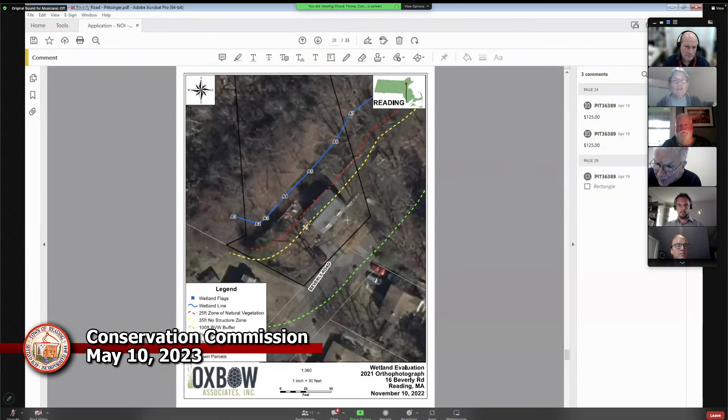On Monday, which was May 7th I believe, 5 of us arrived at 16 Beverly at about 8:30 in the morning to conduct a site visit. At the commencement of the visit, we rang the front doorbell and knocked at the door, but nobody answered. We waited a few moments, then conducted the site visit.

We observed that the property slopes gently downward from the road, approximately 70 feet, at which point we encountered a chain link fence above a retaining wall. The retaining wall was about 10 to 12 feet tall. We measured the back of the house as being about 12 feet from the retaining wall.

The back of the driveway was about 39 feet from the retaining wall. At the base of the retaining wall were the wetlands. They almost abut it, but not quite - we measured that out to about 8 or 9 feet. But what that means is that, as the applicant indicated, the project is fully within the buffer zone, though I believe it's outside of the wetland setback.

To the left of the house as we faced it, we saw a grassy yard where, as the applicant mentioned, there were some 2 large diameter trees that I saw - he mentioned 3, I only saw 2, but he mentioned they've been removed. There is still an oak tree in the front of the yard.

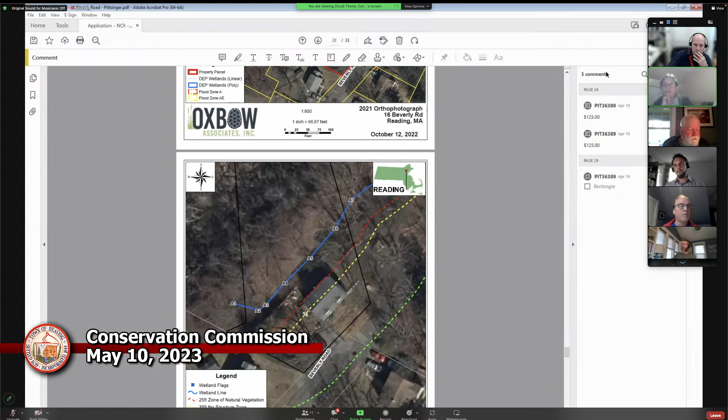Okay, and Bill, you have your hand up. Consistent with what Brian just said, I actually have a lot of questions, but I understand that's not for now, just observations. So the one other observation I would add is where the PVC pipe comes out, it looked like it was connected to the downspout.

There's this significant depression at the base of the retaining wall. The only thing keeping serious soil scour from happening is the fact there happen to be leaves there. There's no structure at all to prevent soil scour. So I'll leave it with that observation for now.

And when it's my turn, I have questions, as Brian does. Thanks.

Anybody else on the commission with observations? Okay, I do have one, and that is that at the front corner of the property where the arrow says 24.3 feet plus or minus, it looked like there's a white fence that goes out to approximately the property line from the side of the house.

I looked back at the aerial photos, and it would appear that fence was put in sometime between 2015 and 2019. And being that this whole property is within the 100-foot buffer zone, it would have been appropriate to have the conservation administrator approve that fence back in 2015 to 2019 when it was put in.

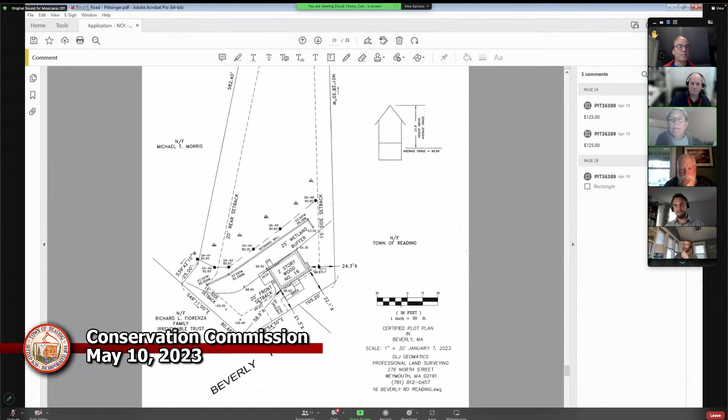Bill. Thank you for the plans, for the information, and also for the information you provided during the site visit. So I'm just going to go through the document with some questions, and if you happen to have an answer as we go along, that'd be great. If you don't, that's fine too.

But let's start with this: based on the documents you received when you purchased the house in 2019, what's your understanding of when the retaining wall was built? I'll explain the reason for that question after you tell us. So from my understanding, the retaining wall was built to facilitate the construction of the house, which was, I believe, in 1990 to 1991. That's what's on the deed.

So when you look at the adjacent land, it falls off pretty quickly, and I assume in order to get the foundation in, they would have needed to do this work. So I believe it's from the same era.

That gets to my next question. From page 1: extending along the bottom and adjacent to the bottom of the wall is a shallow ridge of side cast material excavated when installing the retaining wall. Knowing that this occurred in 1990 to 1991, it's not clear how the specialist would know that. We're talking about quite a few decades here.

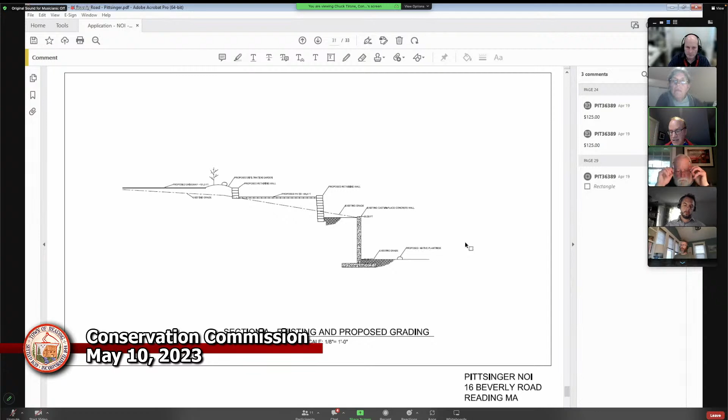Okay, thank you for that. Then on page 2 at the bottom, similarly, it says in the last paragraph, while investigating the wetland resource area, Oxbow documented soil profiles. Portions of the delineation coincide with the extent of the sidecast material excavated during the wall installation. Again, now hearing that's 1990 to 1991, I don't know how your expert confidently made such a conclusion, but that's okay, just putting it out there.

But let's go to page 3 and the proposed project. You've explained about the trees, and you've explained the garage, site work and deck will be in the 35-foot no structure zone, the 25-foot zone of natural vegetation. That's all true, but that raises a very important question to me, one of the key questions of our hearing tonight: why is this being presented as a notice of intent and not as a request for a variance?

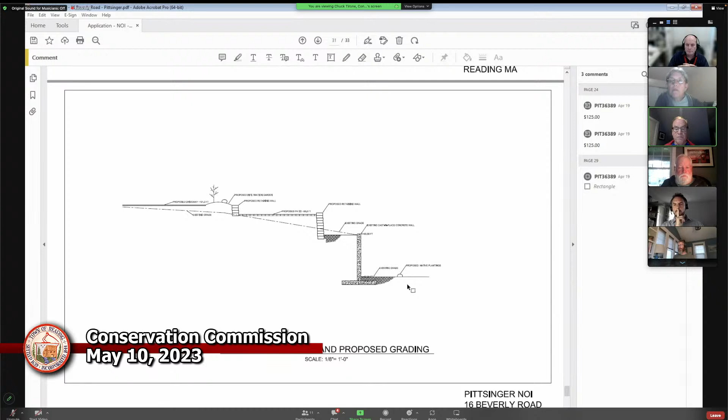Let me explain the reason for my question. It seems to me, based on the fact we're in the 25-foot and 35-foot zone, that what's really needed is a request for a variance, because strict compliance with the regulations simply isn't possible.

And the reason it's important to ask about the variance is there are certain requirements for an applicant, and we assure you we've had many applicants come forward attempting to meet such requirements, where you have to explain alternatives that were considered. Were they reasonable? This is from section 2E of the local regs. What mitigating measures are proposed? And then there has to be an overriding public interest.

Now in the case of a single family home like yours, that can be mitigation which improves the resource area. But there's no description of that here. So at least from my perspective, that's a very big issue.

Then we go to, on page 3, you mentioned engineered infiltration is not recommended, and you have explained that. Your concern about the safety, the integrity of that retaining wall, that makes sense.

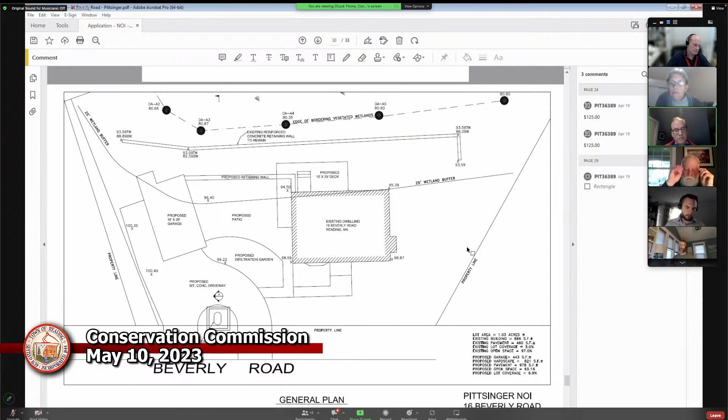But nevertheless, in your diagram, you happen to show at the top level a proposed infiltration garden, which sounds inconsistent with this concern about having any engineered infiltration, because of course an infiltration garden is a kind of engineering of the landscape.

But also, in the same vein, at the base of the existing retaining wall, past the existing grade, it says proposed native plantings. Now that actually looks like the sort of thing one would expect in a plan that's requesting a variance and suggesting mitigation. So I wanted to ask you: that proposed native planting, that proposed infiltration garden, was that in the spirit of offering some kind of mitigation, or is it something else? I'll just pause and let you comment on that.

Sure, yeah. So let me just provide a little bit of background. I employed a few people. So Oxbow, I forget exactly what they are, but they did the wetland delineation, and they provided their assessment of what vegetation was there and things of that nature.

And when you're talking about the side castings and that kind of stuff, that was their wording that they provided to me. And I think they got there by doing some soil plugs and borings, and just looked at what was coming back out of that.

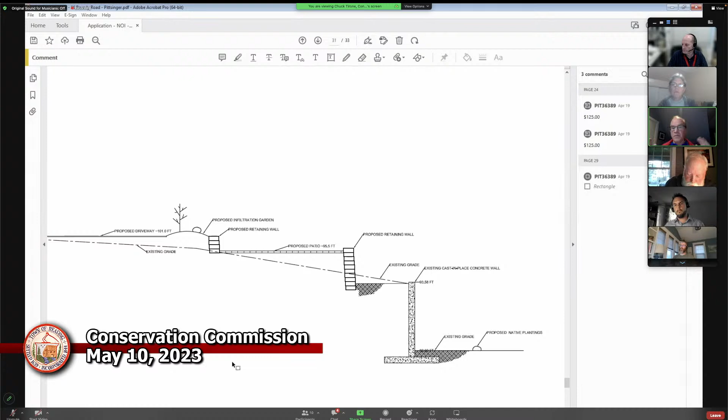This is based on our experience as commissioners seeing a lot of different properties, so just wanted to give you that feedback. The other thing is, it says in the italicized paragraph that the area at the base of the wall is unmaintained. It's unclear to us, given our charge to protect the wetland, why that would be a virtuous thing, that no maintenance is done. I understand what you're saying about the retaining wall, but again, we're focusing on that adjacent wetland. We see water going in various ways - there's the weep holes, there's the black PVC pipe, and there's also the very modest lip right at the edge of a sloping property.

And others will probably speak to this, but what we saw in the soil at the base of that retaining wall, only part of it, we commented on this on-site, looked as if it were naturally vegetated. The rest did not. And if this is all going to work as the regulations intend, at least from where I sit, and others will speak, we would want to see something more there.

On page 5, the proposed work reads that it will all occur in developed portions of the property currently maintained as turf, so no work will impact areas that are not currently developed. Our regulations do not treat maintained turf grass as equivalent to building a structure, a patio, and so forth. In fact, one way to know that's the case—this isn't a minor project, but just to illustrate how it's seen.

For a minor project, for example, conversion of existing lawns to use as accessory to houses, it would have to be located more than 50 feet away, and it would involve modest things like open slotted decks, et cetera. I'm only pointing this out to show that, as I read this, the reasoning seems to be that it's all developed, including the turf lawns, so nothing's really changing here of significance. And I don't think that's consistent with how the regs are written.

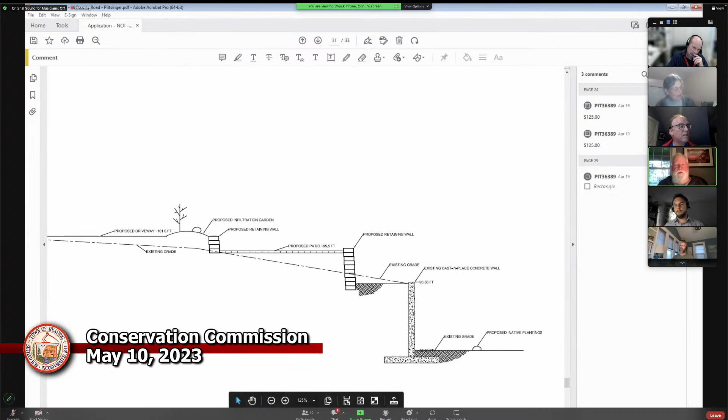So actually, to follow up on something that Bill touched on, Bill talked about alternatives. What alternatives have you considered, Jeff, in particular for the size of the garage, the extent of the driveway, things of that nature?

Sure. I mean, the limitations here are kind of twofold. It's a garage, so it has to be a certain size to function as a garage. At least this size is about as small as it has to get in order to fit a vehicle in there. I'm also restricted by zoning as to how close I can get to the roadway—it's a 20-foot offset, and I have almost exactly a 20-foot offset to the front of that structure. The same goes for the property to the side, which requires about a 15-foot offset, and I have about a 16-foot offset.

So as far as moving it further away from the wetland, there's not a lot of options, as that goes for any part of my property. This is on the left-hand side here. On the right-hand side, obviously the property line necks in pretty quickly, and there's no opportunities there.

So Jeff, if I could cut in for a follow-up—how deep is that garage? On here, it's drawn essentially the same depth as your house, so can you give us actual dimensions? You're asking the depth of the basement?

No, the garage, the proposed garage on the left-hand side. So, 18 by 20, 16 by 20? 16 by 26. So 26 feet deep is what you need to get a car in there? About 24 feet deep would be a minimum to get a car in there. Okay.

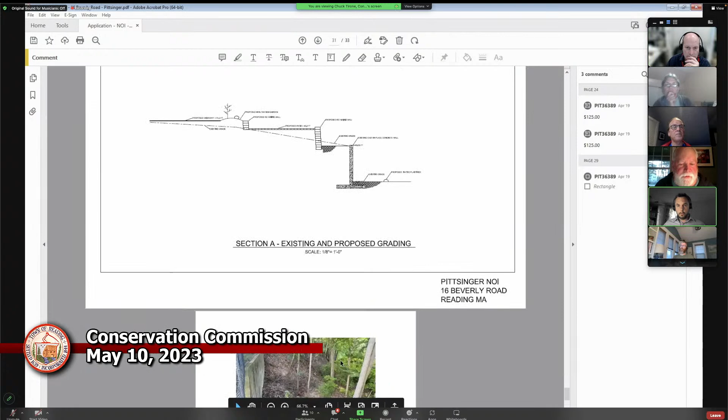Okay, so on your plan, you have a list of various square footages and what have you. Chuck, can you scroll over and down to where those square footages are? A little more, yeah, and then back up—over to the right-hand side. Yep, can you make those larger?

Sure thing. So Jeff, just so the commission understands, this garage also functions as an accessory apartment, so some of the sizing is because of the combination between the two. Yeah, it's also my desire to permit this as an accessory apartment as well.

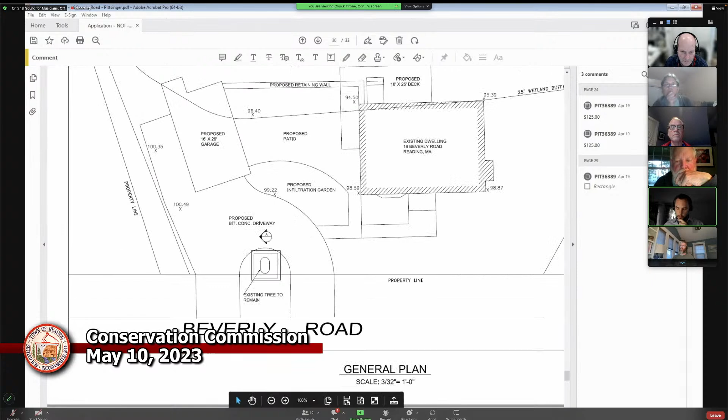Maybe a little bit bigger for these tired eyes. Okay, so yeah, I did break it out here a little bit in more specificity.

So proposed garage is 443 square feet. Proposed hardscape is 821. Proposed pavement is 978. And then I've done the percentages on open space.

Okay, so let me ask you, what is included in your proposed pavement number? It is the area of the driveway, so the entrance from the roadway, the horseshoe structure, and the area up to and beside the garage.

Okay, so when we were there, you were saying that your plan was to remove part of the right-hand side of the driveway in order to add things beyond the tree for your U. So I got the impression that you're expecting the driveway to be essentially the same size, yet here it's basically 2-to-1. Yeah, it is larger.

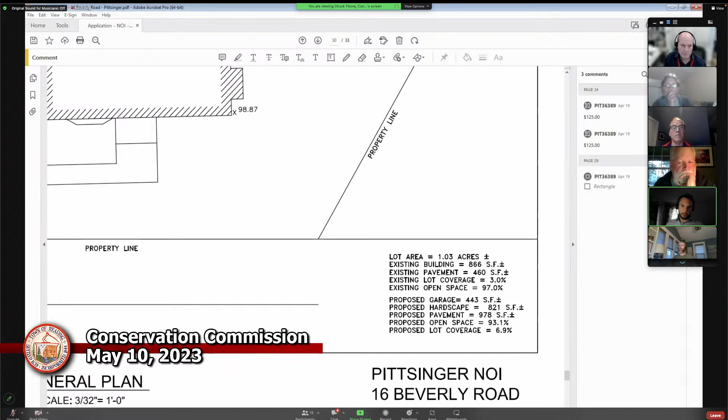I mean, if I keep the driveway where it is right now and then extend it to where the proposed garage is going to be, that's obviously an extension. So there's almost a doubling if I just did that. But that doesn't really work particularly well because the garage is quite a bit further toward the left property line.

So talking to the engineering department, I can split my driveway. It creates a clearer shot into the front of it because I can't remove that tree that's on the property line. Beyond that, because I'm hoping to also have a permanent accessory apartment, I need at least three parking spaces, which this would essentially allow. Even if you put one in the garage, there wouldn't be a way for that car to get out, being the problem with the other two.

That's the intent. Okay, so let's talk about the newer retaining wall for a bit. First point I want to make is, at least from the aerial view, that wall also appears to go well off the property into the property next door. Do you have any thoughts on that?

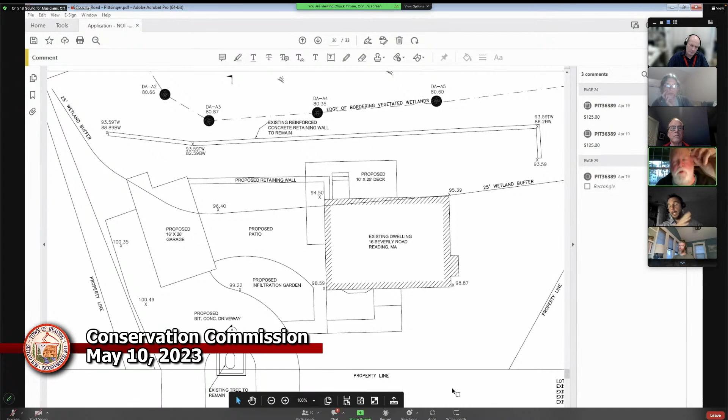Which one is this, the newer retaining wall in conjunction with the trampoline? No, I've measured it subsequently to getting this, and it's on my property. I didn't have a surveyed plan when I built it, and when I purchased the house, I was under the impression that we owned more than we did. But subsequently, I've measured it out, and it's appropriate.

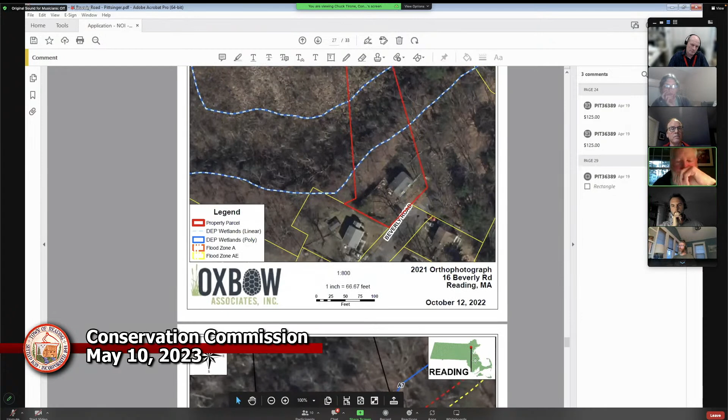Okay, I can double check that on my own, but when I used the GIS and zoomed in, it seemed to be beyond it. So what do you think we do with the fact that we have this recently installed retaining wall that wasn't approved?

You guys are guiding me here. I'm not an expert in this field. I'm looking at things as pragmatically as I can and saying, when I look at this, do I see a significant impact or an impact at all. I understand there's the wetland, there's all these buffers, and I've read through the regs, I understand what's there. I'm just trying to look at it pragmatically and saying, does the change at all impact or significantly impact the surrounding area? And I struggle to believe that it does.

As I said, we have the existing retaining wall that's there that creates this delineation. Going to your point as to whether there's enough freeboard on that to hold back water, I've never seen water flow over it like in a cascade fashion. It would be, if that were to be the case and it happened regularly, it would be stained. You'd see sediment at the bottom and that kind of stuff. It's simply not there.

So that's my perception, is just I look at these things as saying, does it have a detrimental impact to what is already there and corresponding to what's already there? I don't believe it is, and I understand that's not part of the regulations per se.

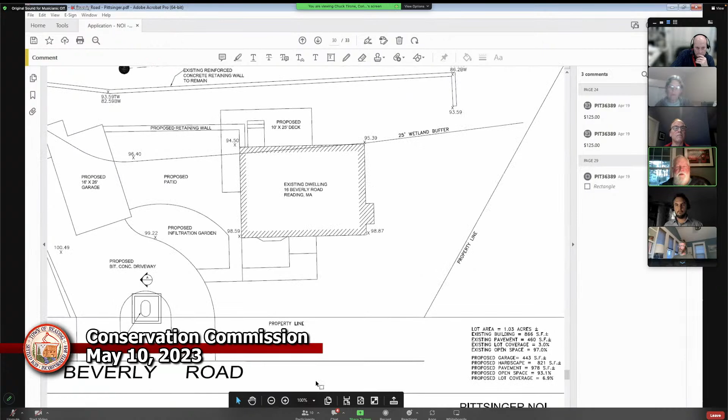So to allow me to finish, in summary, what I'm seeing is a project where you want to basically double your pavement. You want to add a patio, not sure the size of it, a larger deck, and a garage, which is also hoping to be zoned as a living space. And this is all essentially within, or mostly within, the 35-foot zone, and yet you're offering almost nothing for mitigation for that. Is that a fair summation?

I would tend to agree with you. Yeah, it's the first time I'm trying to walk through this and understand what you think mitigation looks like. To some degree, I look at the existing areas below the retaining wall, and yeah, there's certainly yard waste down there, that's for certain. But beyond that, would it be like adding native plantings or otherwise? I guess I can certainly look back into that if that's what needs to be happening.

I'll be honest, I went down the road of an RDA last year. I was given the direction by this crew to pursue an NOI, and so I've done that, and now that's where I'm at now.

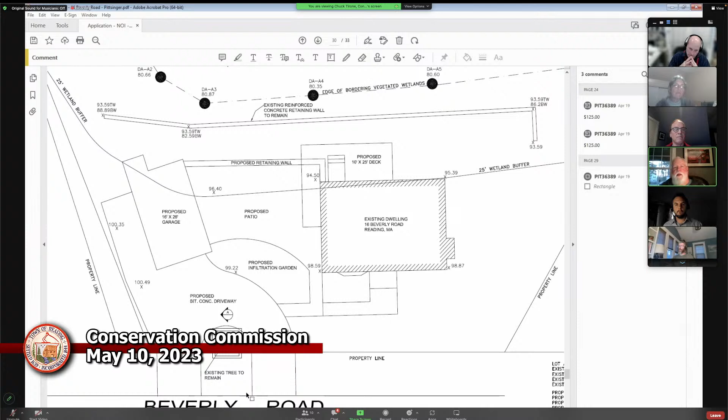So I want to finish up so others can have a turn, but I just need to say that I'm uncomfortable with all of that work you're proposing. I would like to hear if you had different thoughts on alternatives—smaller patio, not a large deck, whatever—but somehow to reduce your impact. And so I'll let it go there, allow others to speak, but just so you know where I'm coming from.

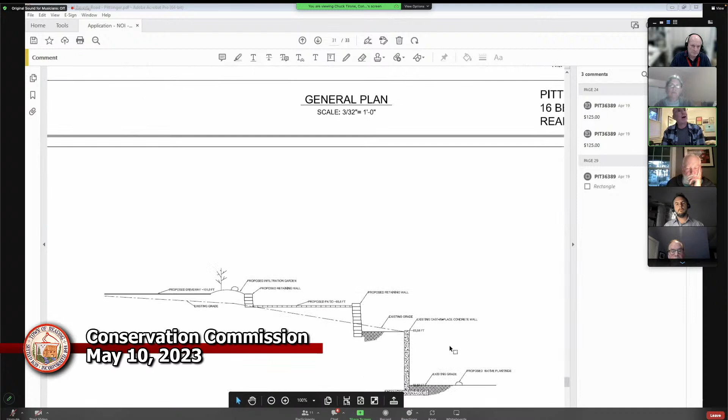I'm guessing that pushes you further into the 25-foot zone. So when you're thinking about how to potentially move things around, make it as much as possible, especially the garage, to be outside of the 25-foot wetland buffer zone. I'm gonna stop there for that kind of stuff.

But the one thing I'm just thinking about is this wall. You say you're engineers, so maybe you could help me with this, but concrete has a lifespan. I don't think we're nearing it for this, but it was built in 1990. Usually 50 years is something like that for a concrete wall. It looks healthy-ish - I'm not an engineer, so maybe you know better - but you definitely see staining on it. I don't see any cracking, but what is the future of this wall? What do you think the lifespan is of that retaining wall?

Well, just addressing the wall itself - there's a crack at the far right-hand corner, right at that 90-degree turn. That's a very common place for increased load, so it's not uncommon to get a crack in the concrete, and the reinforcing then takes care of it after that. There's some cold joints evident in the wall - you can tell from where they poured initially and then didn't consolidate it well enough on subsequent pours. So those are things that you look at.

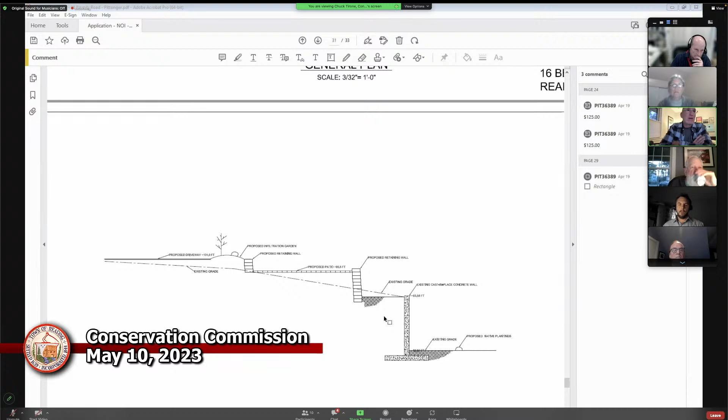So, anecdotally, my neighbor has been at his property for 40 years. He saw this whole construction and told me about it - there was some significant earth-moving equipment sitting in the wetlands. That's what happened. So that's where I understand your point, honestly. The damage was done 30-plus years ago, so what's going to happen up top now is questionable in my mind.

I need to think about it more and maybe ask our circuit rider. I need to process it more personally. But I would appreciate it if you came back and showed us some potential alternatives for how you could move things around. I'll leave it at that for now.

Tony has his hand up.

Hi, thank you for coming tonight and for answering all the questions presented to you. This is a fairly in-depth discussion, and you seem very well prepared. I wanted to say that I think there's an opportunity here with this project to improve the current hydrological connection between the property and the abutting wetland.

We've spoken a little bit about that 6-inch approximate PVC pipe near the top of the retaining wall. We've asked some questions about where runoff from the road gets directed through your driveway and cuts into your lawn a little bit, where that ponds up, and how that goes over the wall.

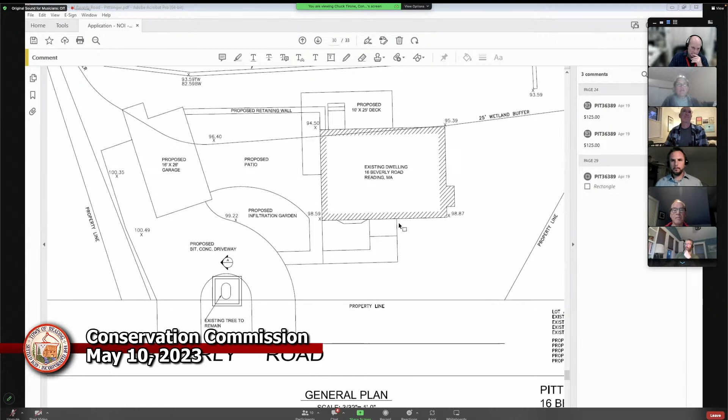And so Jeb, in the spirit of giving you some practical suggestions, what we typically see in a case like this, when there's going to be an expansion of structures in the 25, 35-foot zone, in terms of mitigation, we often look for what square footage you're changing elsewhere that is of benefit to the wetlands. So planting of vegetation, the scour area underneath that black pipe, and so forth. So one place, and I think some others would encourage you to look, is at the base of the wall, between the wall and the wetland, and thinking about whether it's possible to get more natural vegetation in here.

Is it possible to put some device in there that will prevent scour from the black outfall pipe? I mean, we saw the weeps and they're not presenting the same kind of issue. You don't see a concave spot there like you do under that. So those kinds of practical things we would encourage you to think about.

You gave us the percentages in the 90s because it looks at the whole property. That makes sense. But we'd encourage you to actually look at the square footage at the core of the project, what you're adding, and then just ask, thinking creatively, is it possible that I could do planting of native vegetation and so forth in a way that may benefit the wetland, because I've got that area between the base of the wall, for example. I'm not stepping on what others have said about other things you can look at, but I'm just trying to give you additional practical suggestions to think about in terms of mitigation.

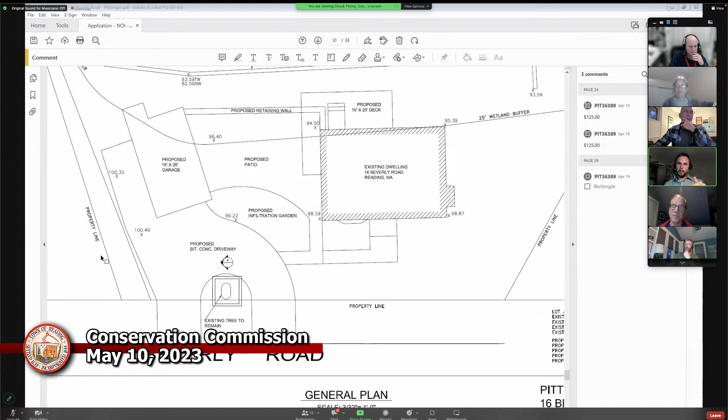Could you clarify something for me? Would it be appropriate? Obviously, the distance between the wall and the wetland delineation is quite tight. Is it appropriate for me to suggest plantings within the wetland? It is sometimes possible to do that, so you could have a look at that as well.

When we were down there, if you walk along the base of that long wall, we saw an area that, and Martha, you might have a recollection of this too, where there seemed to be some native vegetation, some moss, but other parts of the wall that seemed to be completely absent. And so thinking about, can more of the base of the wall look that way?

And indeed, as you're suggesting, Jeb, in some cases, another degraded area is identified in a wetland. And so the offer is, well, I can do some work there. This is a degraded area of the wetland that can be improved. And that's the kind of mitigation trade-off that can be appealing, because again, it's just the net benefit to the resource area. So I appreciate you raising that as well.

The reason I mentioned is kind of like talking about these side castings, right? If you move a lot of that, whatever the yard waste that's there, then it's crushed stone. There's not going to be anything that really is going to take to that. And probably, frankly, the reason that some of the plants have grown there is because they've grown in yard waste.

That's why I'm asking. If it's not likely I'm going to be able to get anything to take that close to the wall, it's going to have to be further away. And that kind of creative thinking is appreciated, because obviously the casting isn't a natural part of the area. To the extent some of that can be removed, you're improving the resource area. Again, that kind of thinking is what we typically look for.

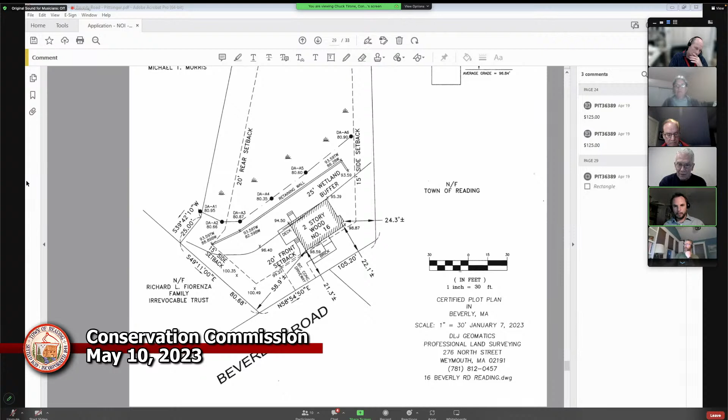So the water flowing through the lawn actually doesn't bother me that much. I don't take great care of my grass. You guys were here, you saw that. It's just a matter of trying to make it kind of work so that it's not muddy basically.

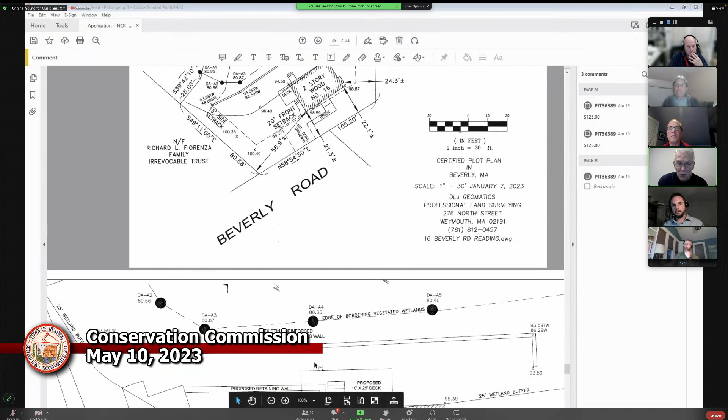Your new design shows a driveway. Do you anticipate the water is going to come down to your driveway and infiltrate your garage? Or do you anticipate it going over to that infiltration garden?

So if you want to scroll down to the cross section at A, I've tried to show it there a little bit. So I'm proposing to set the garage at slightly higher than the grade of the roadway. And then there'll be some filling, as you can see on the right-hand side of this, that essentially will match grade. So that way the driveway will be slightly higher than the roadway. That's my hope. Thank you.

I have a comment based on what Walter said. I've seen a road where there's a little bit of a lip at the driveway going into the property, so that the water stays on the road and continues down the road. So if you're paving your driveway, you might want to grade it so it has to go up and over a 3 or 4 inch rise before you get into your driveway. That would steer the water to the town water department land, rather than having it run across your property. Okay, noted.

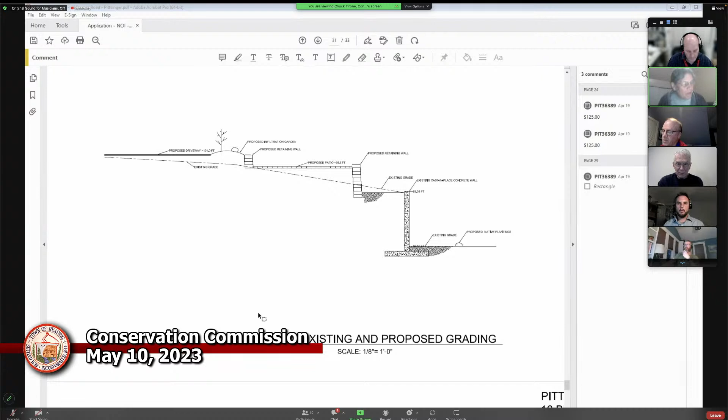I don't see a lot of other hands popping up, and I've been taking notes while everybody's been talking and come up with a bunch of questions. Can we go back to the next plot up? Chuck, scroll up. Yeah, right there.

You've got a picture here of Beverly Road and the property line. So is the paved road ending down near the words Beverly Road, and then the driveway you have to install actually goes quite a ways off your property line to meet Beverly Road? Yeah. Okay. But the way I see where the tree is located, the existing tree to remain looks like it's inside your property line and not on the town property. But you said Mike Hannaford said it is a town tree.

I didn't have a hard survey at the time. We were out here, we pulled some tape off of some existing monuments, and we generally agreed that at least half the tree, or a proportion of it, was on town land. Now, if we're going to talk inches, then maybe it is my tree, but I wasn't going to go down that road and try to argue it.

I'm just thinking, given the rot that we saw at the base of that tree when we were there—though I think it's always good to save oak trees—I'm afraid you may be coming back to the commission in not too many years to say this tree is now in grave danger of collapsing onto my house, or across the street onto the neighbor. Looking at one of the trees you already took down, which has a big center rot in the middle, that concerns me.

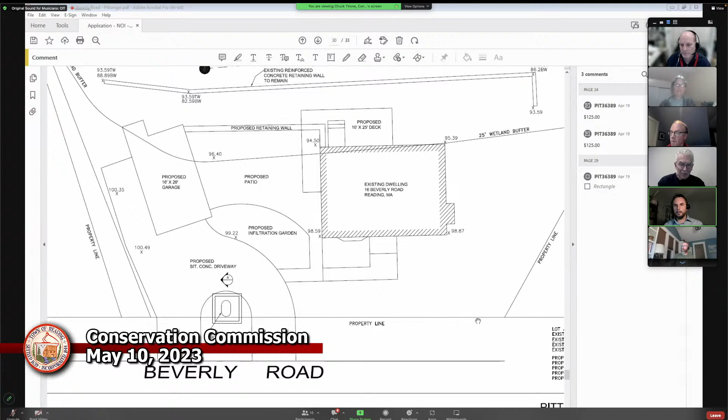The other thing with the driveway and the double entrance, it seems to be completely on top of the root zone of that tree, and that's going to impact the tree. If you're keeping the tree, I'm going to consider that tree one that needs to be protected, and you're impacting the root zones by paving over it, so it's going to lose oxygen. That needs to be looked at also.

Hopefully with the Aquifer Protection District, the comments about the driveway, and the fact that you want to save the tree, we are going to lose some of this driveway, a little bit of it. Maybe it can be reconfigured. With the two entrances, what I see is only a second area for someone to park by the road and be able to leave without interrupting the other two cars. Maybe that could happen on the street since you live on a dead end.

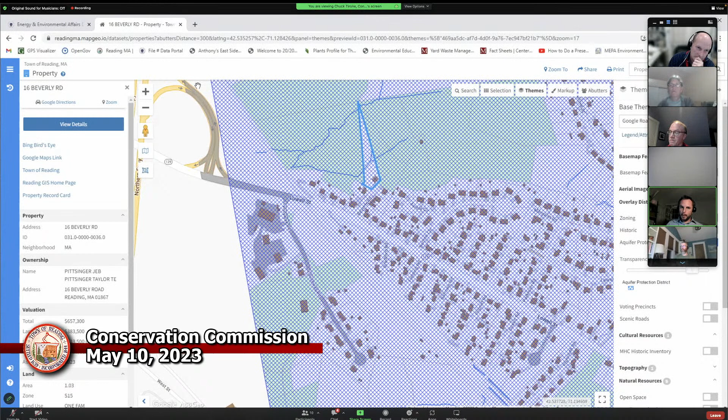Okay, so I've taken my own notes. Will you guys be providing bullet points, or how does that work? No, we'll just make sure if you had anything that you missed, we can compare notes just to make sure you get the full list. But if you think you have them adequately, that's fine with me.

And then regarding the parking, the zoning law requires me to have adequate space if I'm going to add an accessory apartment. So I do believe I need to have at least 3 spaces. I'll look into that and validate it, but I do believe that's going to be my response.

It's not 2 entrances, it's one in front of the garage and one next to the garage. There's 3 spots as I see it, and it eliminates one side. That's what I'm looking at. I just wanted to say that so you knew where I was going, and not just seeing those spaces. But it's all about just looking into it, so if you came up with an answer to that, I'd like to hear it. Thank you.

Okay, Martha, so our next meeting is the 24th, and the meeting after that will be the 14th, because there are 5 Wednesdays in May. So we could continue to the 24th, and if you're not ready by the 24th, we can just continue again to the 14th, or we can vote right now to continue to the 14th.